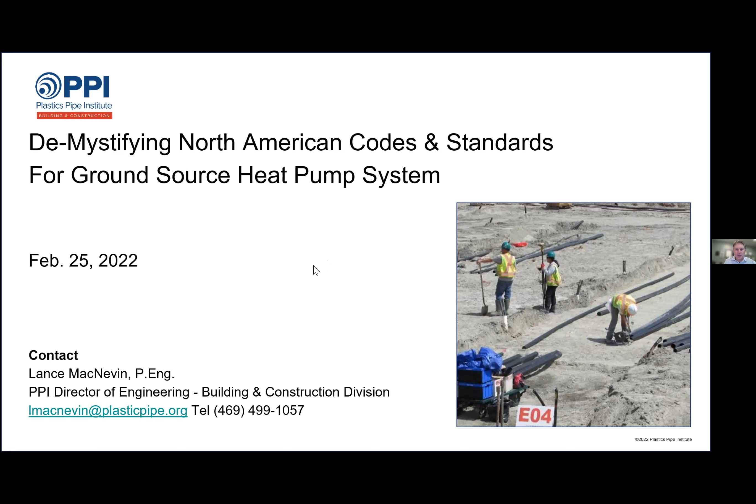So that's kind of the lay of the land in terms of what we'll be talking about for the next 45 minutes or so. And then we'll have time at the end for Q&A. Jeff read my introduction already, but I'm going to show it again because we are going to be talking about a lot of acronyms, a lot of industry names. So just in case you're not familiar with those, I'm just going to kind of spell them out a little bit.

If you hear people talking about ASTM, that originally was formed about 100 years ago as the American Society for Testing and Materials. And that's a group that writes product standards. ASPE is the American Society of Plumbing Engineers, made up of about 6,500 people, most of them plumbing engineers. AWWA is the American Water Works Association, that also develops standards for everything from products to installation to disinfection procedures. CSA is Canadian Standards Association, also known as CSA Group.

IAPMO is the International Association of Plumbing and Mechanical Officials. That is a code developer that we'll be talking about today. ICC is the International Code Council, also a code developer. IGSHPA, we all know who IGSHPA is, and NSF is more properly known as NSF International, but they were originally incorporated as the National Sanitation Foundation.

So if I do speak acronym a lot and use a lot of those things over and over, at least now you know what they stand for, or at least what they originally stood for. A lot of them don't really go by their full name anymore, like ASTM, they just go by ASTM International because their standards have been adopted well outside of the United States and all over the world. My contact information is shown there. As Jeff mentioned, I work for an organization known as the Plastics Pipe Institute. So just like IGSHPA, PPI is a nonprofit trade association.

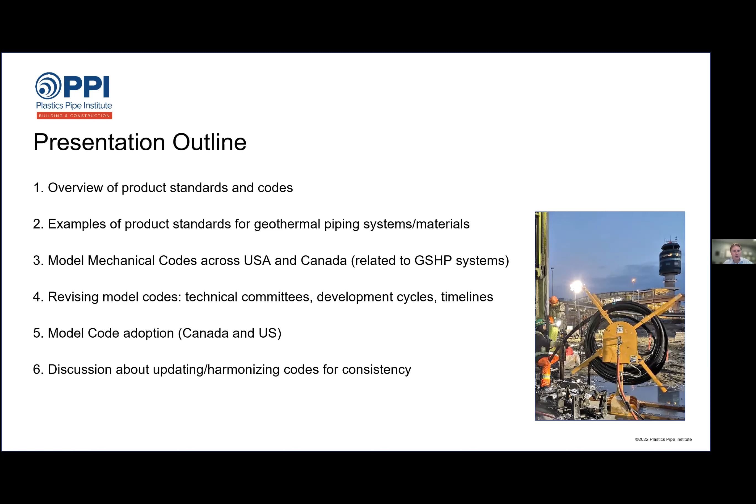And then at the end, item 6 is just really one slide with a discussion about let's work better at trying to harmonize code adoption so that there's not a different code in the next county over or the next state over, because I notice many drillers today are probably working in lots of different territories, dealing with different codes every time you drive 50 miles. So it'd be nice if we could have more uniformity in our regulations. So that's how we'll wrap up, and then we can open it up for discussion.

So if all that sounds good, we're going to start with section 1, which is an overview of product standards and codes, starting with product standards.

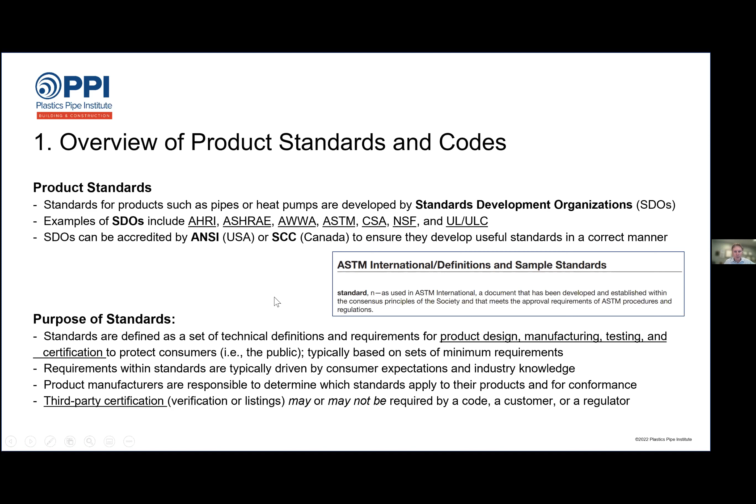Hopefully everybody is still here, because now we're going to move on to codes, and in particular building codes, which we're all pretty familiar with. A building code, it's a legally adopted document by a jurisdiction. So it could start as a document that somebody wrote or some committee wrote, but it really has teeth once it's adopted by a jurisdiction for the purpose of regulating a portion of the design and the construction industry.

And you're going to hear the term model codes a lot, because these big organizations such as International Code Council and IAPMO and National Research Council in Canada, that's NRC, they write what we call model codes. They're not the law of the land until a jurisdiction adopts them.

So I live in Virginia. Virginia regulators, the government of Virginia decides which code to adopt as the Virginia Building Code or the Virginia Plumbing Code. So normally they'll not try to write their own code from scratch in the state of Virginia, because it's pretty complicated to do that. The codes that have been around that are published today, many of them have been published for decades, 30, 40, 50 years.

They're constantly being updated and refined and having new products and methodologies added, and always getting safer too. So it's much better for a jurisdiction to adopt a code that's been around for a long time, gone through 20 iterations to get to where it is today, as opposed to starting from scratch and writing their own code.

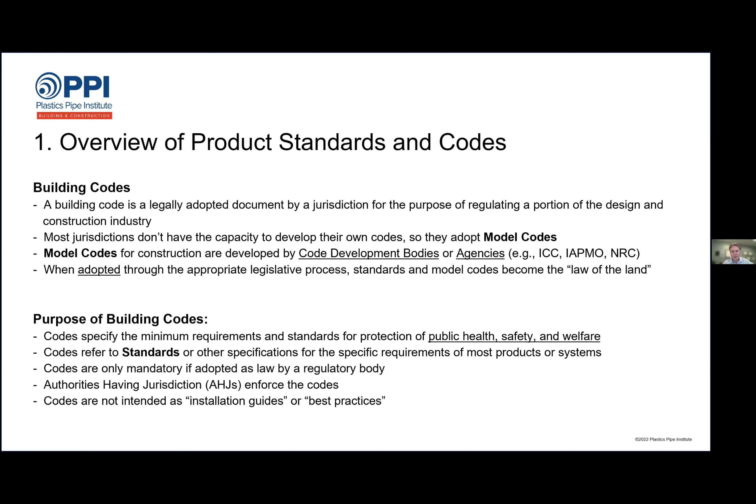But it also says if you're involved with code development, keep in mind, they're not intended as installation guides or best practices. Codes have to be written in mandatory language that says you shall do this or you shall not do that. You can go way beyond the code and do a much better job, but that's not the code's job of telling you how to make the very best, most optimal system in the world. The job of the code is to define systems that will work and that will be safe for the public.

So that was our introduction, just 2 slides. Now we're going to get into some examples of product standards. So when we talk about standards, I'm going to focus on pipes because I'm obviously a pipe guy and you people are pipe people too, because the geothermal industry uses a tremendous amount of pipe. So hopefully this is relevant to everybody. So some examples of pipe standards, kind of alphabetically.

The first one we have here is AWWA C901. This is from the American Water Works Association. It's a standard for polyethylene pipe for water service, all the way up to 3-inch diameter pipes. So it's really written for water service, but those are very good quality pipes with high pressure capabilities and everything else. So AWWA C901 is sometimes used as a reference standard for pipes that are appropriate for geothermal systems. Because if a C901 pipe can keep the water inside for many, many decades and is safe for potable water, it's probably also safe for geothermal systems.

So that's one example. Here's an example from ASTM. ASTM standards always have a letter followed by 3 or 4 numbers. So D3035 is a standard for polyethylene pipe based on controlled outside diameter. So that would be OD-based pipe. So that is another standard.

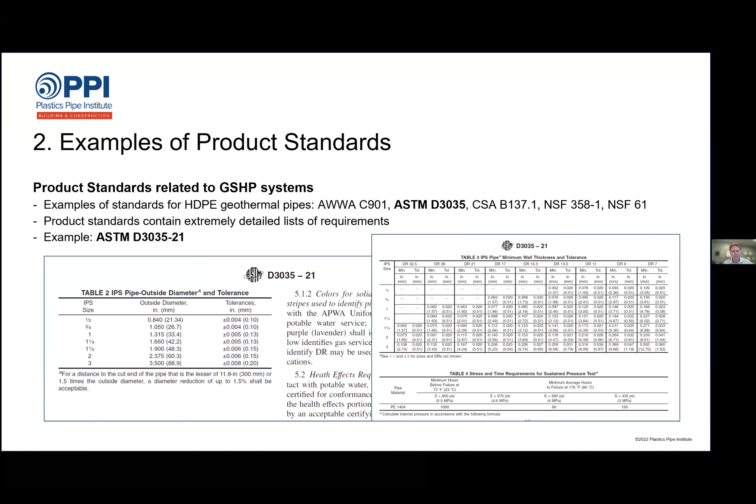But about 8 or 9 years ago, a lot of people from the geothermal industry in both Canada and the US said, you know what, that C448 standard for Canada, it's not bad, and it's a good standard for geothermal, but it needs to be written in a different way to be adopted in the US. So a so-called binational technical committee was formed, mostly under the umbrella guidance of Mark Metzner, who put this team together starting around 2012, 2013. People representing all kinds of organizations on both sides of the border to put together a standard that could be adopted in both countries. So it was in accordance with the ANSI standards development requirements so that it could be adopted in the US as well.

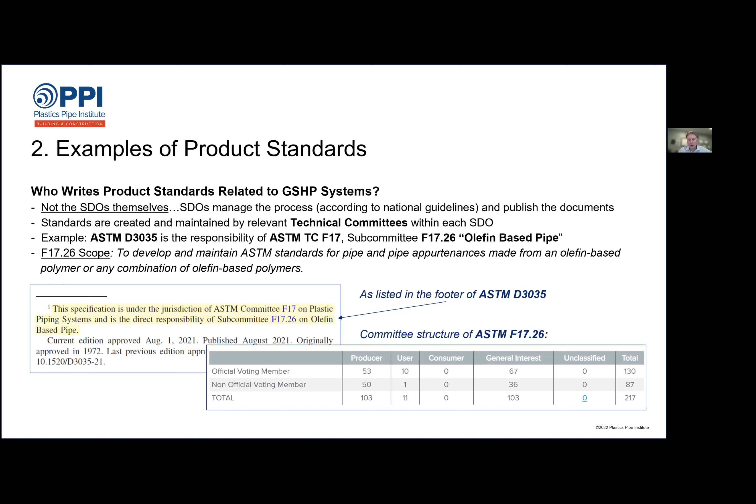Within CSA C448 that we just talked about, if you actually have a copy of C448, there's 4 pages near the beginning of the document that actually spell out who all the members of that technical committee are. So many of you are probably on this webinar right now. Thank you for your service on C448. It is a pleasure to serve with you on that committee because we're doing very good, important work there.

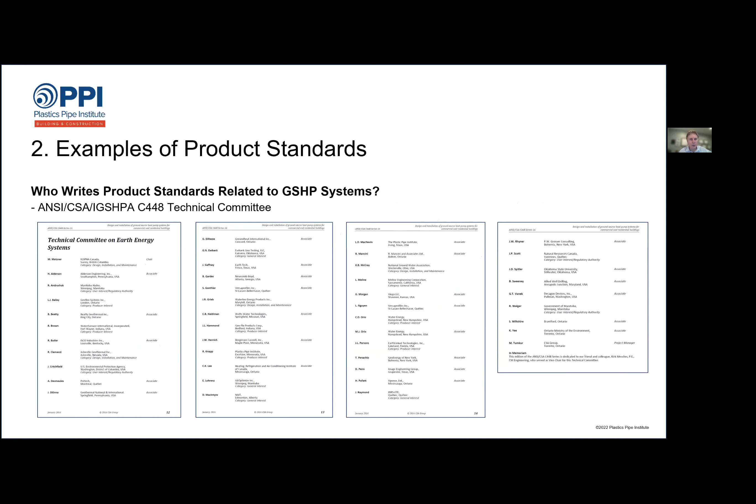They have the Uniform Mechanical Code, which has been around for many decades. And the other code is called the Uniform Solar, Hydronics, and Geothermal Code. 10 years ago, that was just known as the Uniform Solar Code. In 2015, they added hydronic content, and then afterwards, they added geothermal content. So those are 2 separate codes. The Uniform Mechanical Code covers everything from gas piping and ducting systems, and it's probably 500 pages. The Uniform Solar, Hydronic, and Geothermal Code is probably closer to 200 pages of content.

From the ICC family, we have the International Mechanical Code, which is focused just on mechanical systems, so it's analogous to the UMC. But then there's also the International Residential Code from ICC, which is basically the building code for 1 and 2 family dwellings, and then it has a subsection on plumbing and a subsection on mechanical systems. So sometimes you'll hear people talking about the IRC-M. The -M means the mechanical section of the IRC.

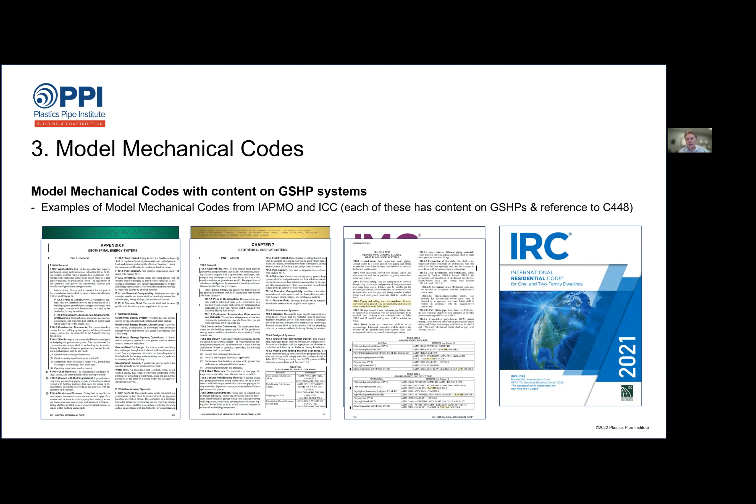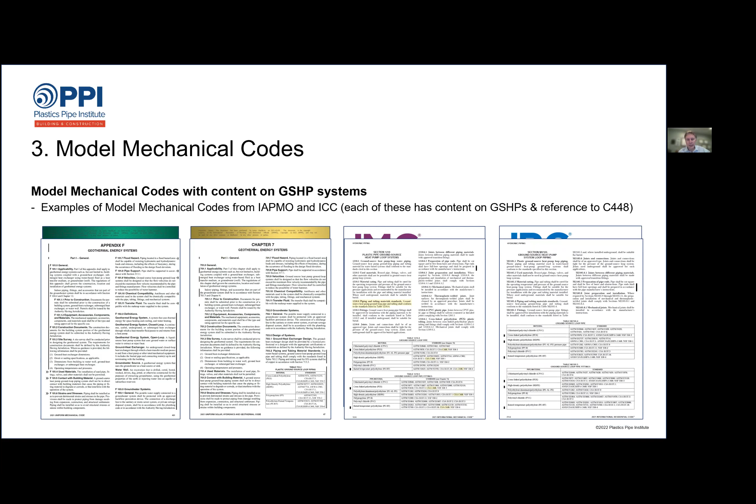Within the IMC, you have Section 1210, which doesn't get into a ton of detail on the whole geothermal system. It's really focused, probably pretty hard to read this, but what it shows under the IMC page view, it's for plastic pipe ground source heat pump loop systems. So it really focuses on the ground loop piping is what's in the IMC. No specifications for the other part of the system, it's really just about the piping. And then similarly with the IRC, when you find the section about geothermal, it's really focused just on the ground loop piping. So there is content in all of these codes, and they all refer to C448.

So for example, the International Mechanical Code was revised in 2021 with direct reference to ANSI CSA IGSHPA C448. So if you go to that code and you look in section 1210.8, under installation, it says piping, valves, fittings, and connections shall be installed in accordance with ANSI CSA IGSHPA C448 and the manufacturer's instructions. So in other words, if you're doing ground loop systems, you better get a copy of C448 and read what it says about how to put your ground loop systems into the ground, because that is a requirement in the International Mechanical Code as of 2021, which is just last year.

Now, something else about code adoption we'll talk about in a minute. If you live in an area that uses the I codes, they might not necessarily have adopted the 2021 edition yet. And there's often a lot of unfortunate delays. These code committees work really hard to update these codes every 3 years, but sometimes the jurisdictions that use those codes only adopt every second version, or maybe only every third version, which would mean only every 9 years are they actually updating the code that they enforce within their jurisdiction.

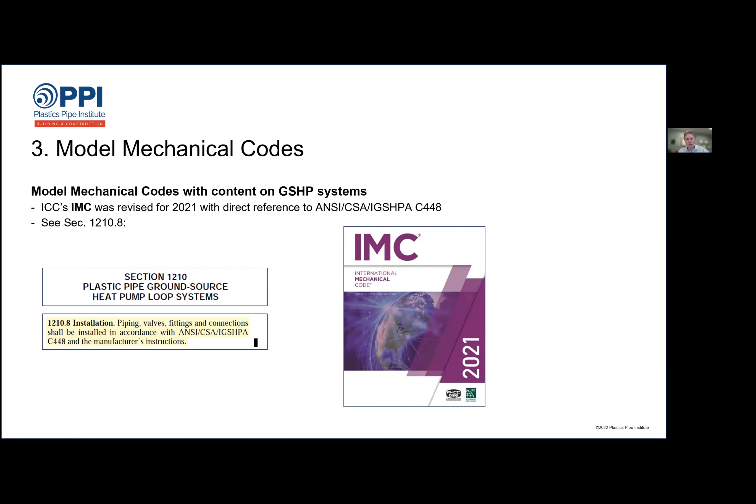And each jurisdiction sets their own rules in terms of when they're going to adopt a new version of a code. But these code development agencies are always promoting their new code as being better than the old one, and they are, and they would like to get them adopted as quickly as possible.

Now, just like we talked about with standards in terms of how a standard gets revised, now we're talking about how a code gets revised. So like I said at the beginning, if there's language in one of these codes that affects you, and you've said to yourself, who the heck wrote that stuff? I could do better. There is a way of getting involved with all of these.

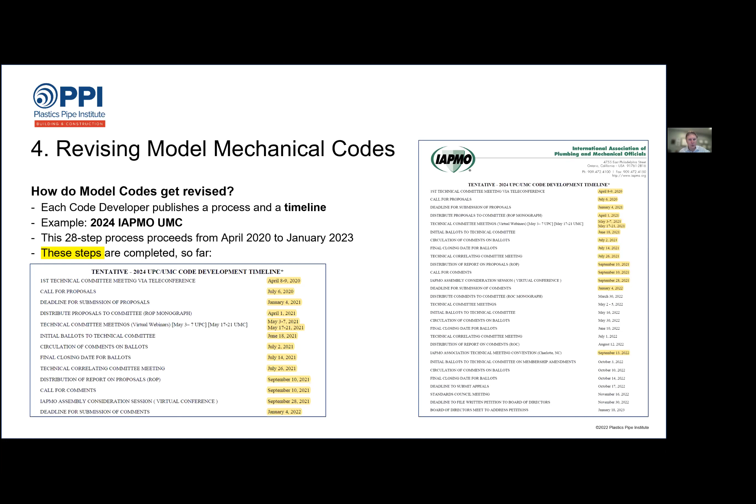The next step for the UMC is the committee is going to be meeting in early May. If you can read the image on the right where it says technical committee meetings from May 2 to 5, 2022, that will be an in-person meeting in Anaheim, California, where that technical committee will meet for 2 days on the UMC to discuss all the public comments and decide if they want to accept public comments or reject them. So again, a lot of details involved with the process. I'll try not to get into the weeds any deeper.

However, within ICC, they're actually a little bit further ahead in the process, and development of the 2024 ICC codes is mostly complete at this point, which is still 2022. So right now, if anybody has an idea for a big change to an ICC code, you're probably going to be proposing it for inclusion in the 2027 version of the ICC code. So this is a marathon, not a sprint.

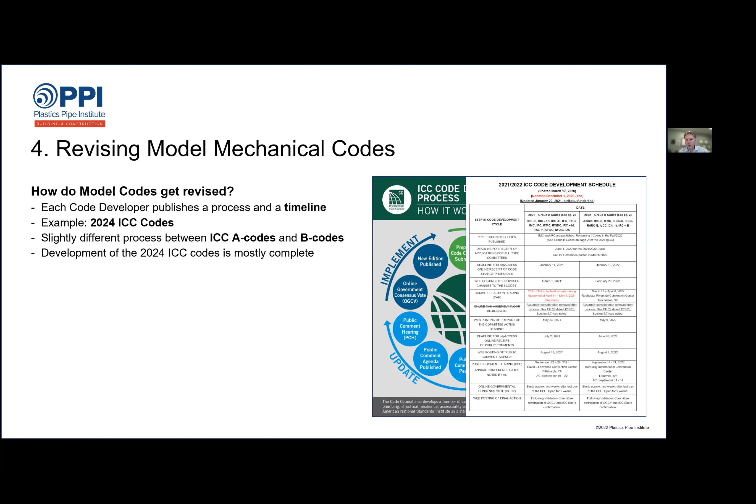You have to be quite patient and meet all these deadlines, make sure you attend all these hearings to speak to what your proposal was, defend it to the committee. You have to go up to the podium sometimes and say, I was the proponent of this. Here's why I wrote it. Here's why you should approve it. I'll answer any questions. Go through that kind of a process. Very formal. Robert's Rules of Order all day long.

So those codes are kind of wrapped up mostly for 2024. The code still open for business, though, and still open for proposals is the IAPMO code, again, the Uniform Solar Hydronics and Geothermal Code. This one is about a year behind the other IAPMO codes in terms of its development cycle. And right now, work is underway to develop the next edition of this one.

And the submission deadline for proposed changes is March 4th, which, believe it or not, is actually next week. So it's coming up soon. Not to spring this on you at the last minute, the window for accepting proposals to the next code was opened way back last fall, I think in late September, early October. And IAPMO issued press releases about code development for this code opening up.

Now, one thing that IAPMO did do for the next edition of this code is they formed 4 task groups, and again, promoted those through public media and the trade magazines, and anybody could join. You did not have to be an IAPMO member to join one of the task groups. So for instance, I served in the hydronics task group, which had 5 meetings over the last few months. And I also served on the geothermal task group, which had 5 meetings over the last 2 or 3 months. In fact, the 5th meeting for the geothermal task group was just on Wednesday of this week.

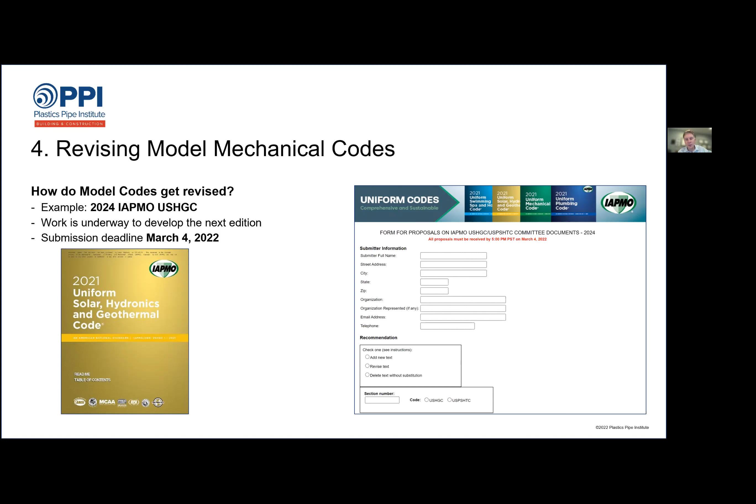And that task group includes people who you probably know, like Carrie Smith, Jeff Persons, Roshan Ravankar, Jeff Hammond, all of us working together to try to, in a task group way, agree to new language before it gets officially submitted to the technical committee. The technical committee for this code will receive all these proposals in early May and will meet on June 21st at the IAPMO headquarters in Ontario, California. The first day of summer will be spent in their office reading all the proposals for the next edition of the USHGC. And I'm on this committee, so that's how I know some of these details.

So if you're ever wondering again, who are the people that write these codes? That's not a secret. And in fact, inside the code book, inside the cover somewhere, you will actually find the list of all the different members. And the code development organizations, they try to keep it balanced. They don't want to have just a bunch of installers or just a bunch of manufacturers or anything like that. So they really do try to have a good representation of all the different stakeholders in the industry involved in one of these committees. So for the UMC, that's what's shown on the screen here.

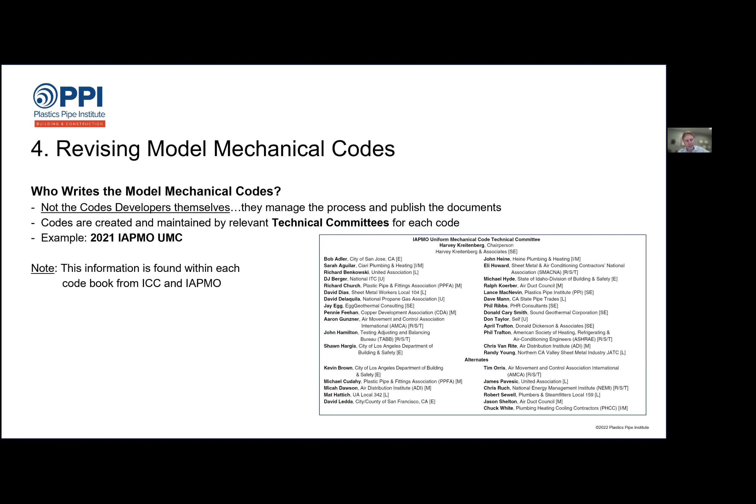There's a bunch of different associations and some actual plumbers and some inspectors, users of the code. So it's a wide variety of people involved with the development of the Uniform Mechanical Code. And again, it's not a secret. It's very transparent if you have a copy of the document.

All right, so now we're going to move into model code adoption, and we're almost done. Now we have some nice maps to look at. As I mentioned before, in Canada, CSA C448 is actually already adopted in the National Building Code of Canada. So it is the law of the land. The current version of the National Building Code of Canada was published in 2015. So it refers to C448-12, the previous edition. When the next edition of the National Building Code of Canada comes out, it should be referring to the 2016 edition. Meanwhile, we're working on the next edition.

And when the work that Jeff is leading to make the next edition of C448 is done, and that finally gets published, it'll probably have to wait a couple of years before it gets adopted into the National Building Code of Canada, which is supposed to be on a 5-year cycle. However, if you're working in Canada, in any province, any city, you could even lobby to have the newer version of C448 adopted, because it'll probably be much better than the current version. They normally are.

In the US, if you go to the IAPMO website, they do have a web page that shows where their codes are adopted. Here's just a couple of screenshots of that here. This is not complete, but these are some areas where the various IAPMO plumbing and mechanical codes are adopted.

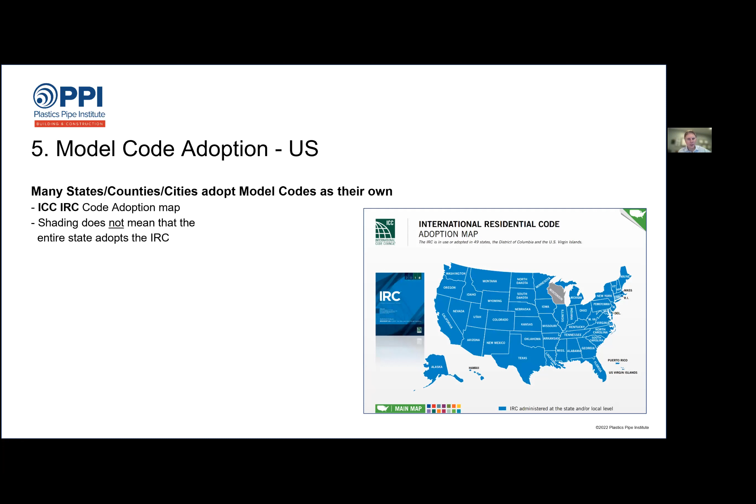And then unfortunately, we have a lot of states or other jurisdictions that do this on their own. They don't follow the model code. They try to develop their own. And I'm sure a lot of you on today's webinar have run into this. A few years ago, the state of Minnesota opened up to listen to comments about its geothermal heat exchanger program. So it's code for geothermal boreholes.

And it was open to the public. Anybody could submit comments. But Ryan Carda actually put together a good team of people from the IGSHPA organization to review what the current Minnesota rules were coming from the Minnesota Department of Health, and then put together a document with proposed changes. So a big team of people worked on that for probably 4 or 5 months. Ryan submitted it on behalf of that team of people.

And then ultimately the Minnesota group of officials that read the changes that were submitted by the group of people representing IGSHPA accepted about 25% of the changes that were submitted, far less than half. So it didn't necessarily go over really well, but that's the process in Minnesota. So if you want to change it, what you do is you try again, and you keep trying to change the rules.

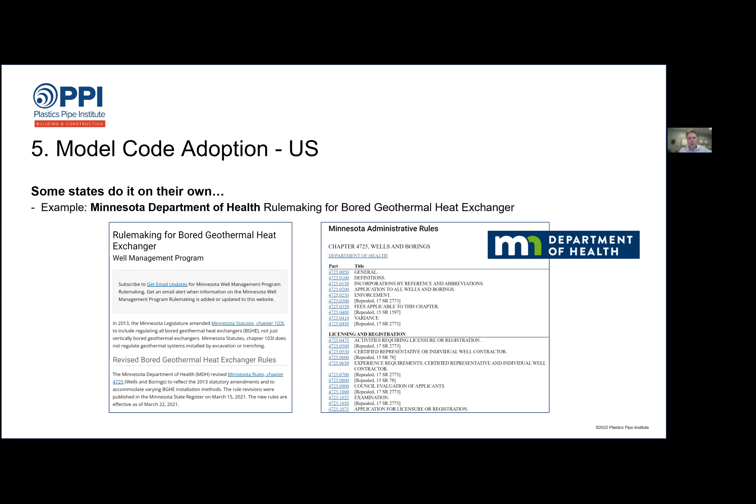The problem though, with states that make up their own codes, let's say for geothermal, or counties or cities that make up their own codes, they could cite inappropriate product standards. And that could cause confusion with manufacturers and the supply chain and the installers. And this does happen a lot, even on the piping side, where they list the wrong piping standards. And then everybody who is trying to supply a system is like, what are they really looking for? I'm not sure what the requirements are here.

So you could call those custom codes, and they often try to be a little bit of this, a little bit of that. They try to pull the best out of one code, the best out of another code to make their new superior code that works best for the state of whatever, which reminds me of the story of Dr. Frankenstein, who tried to make the superhuman being based on the head of the smartest person, the legs of the strongest person, all these bits and pieces from various people, where he tried to really create the best person.

That's what some of these code creators try to do, but you know the story of Dr. Frankenstein's monster. It didn't work out well. That wasn't really what was intended. You should just allow the natural process to develop the most evolved species, or in this case, rely on model codes that have very defined, deliberate processes with lots of great experts from around the country to develop the best version of these model codes.

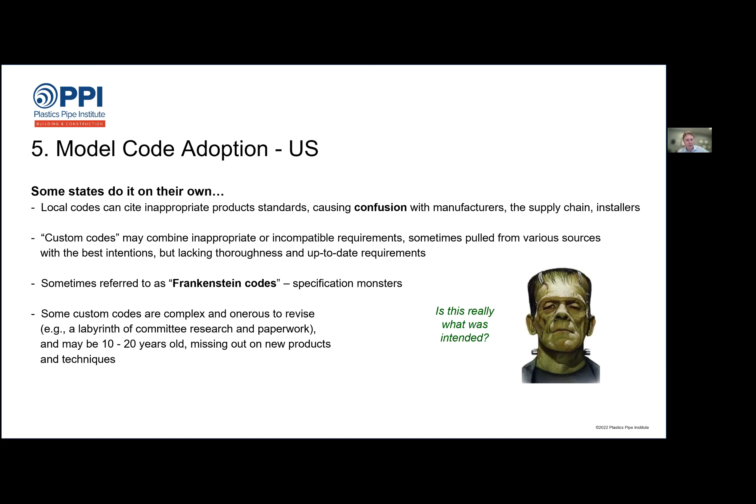So for everybody who's been involved with one of those situations where your local code isn't the same as a national code, and it's very restrictive and may even seem to be a little bit bizarre, we all feel that pain. And really the best path forward is my last slide. Let's focus on the single best code that we can put together as an industry. And then let's work really hard as an industry and a collection of associations to try to get that single best code adopted all over in Canada and the US. And I think that's what's going on with the work on C448.

This slide starts with, why should harmonizing codes be this difficult? And it really is hard to change codes, no doubt about it. But heat works the same, no matter what jurisdiction you're in. Ground source heat pumps work the same, no matter what jurisdiction you're in. Modeling should work the same, no matter what jurisdiction you're in. Grouting should work the same, no matter what jurisdiction you're in.

So having really one uniform code that has the best collection of minds working together on it in a deliberate process, as is going on with C448. I have a lot of faith in that process, being led by Jeff and Mark Metzner and many other subcommittee chairs and task force chairs. And I really believe that's going to develop an amazing code, probably the best in the world when it comes to geothermal systems. C448 is already excellent. It's going to get even better in the next edition. And that'll simply benefit everybody involved in this industry, I think.

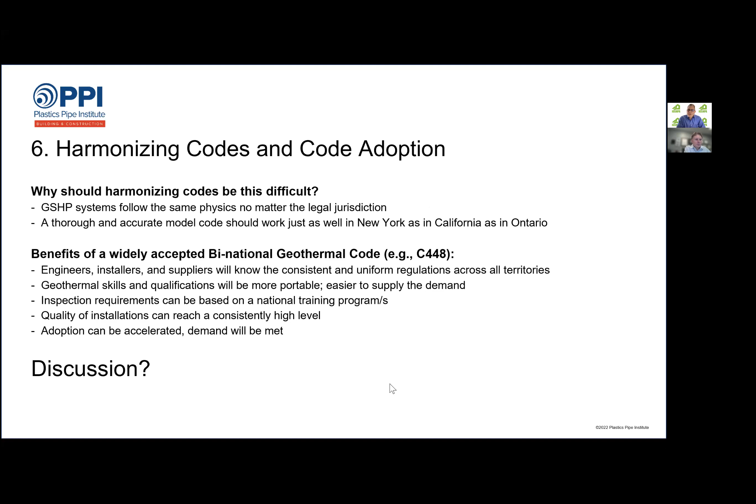Maybe in our last couple minutes, do you have any updates on new pipe technology or new products that you're seeing at PPI? Sure. For those involved with C448 or the other codes, one of the materials I mentioned earlier, PERT, polyethylene of raised temperature capability. It's a relatively new product in North America. It is high density polyethylene that is capable of withstanding higher temperatures. And there are ASTM and CSA standards written for PERT now. So we're going to propose to add PERT as a new material into the codes.

We're updating some of the detailed information about polyethylene requirements and PEX requirements. In the next edition of C448, the piping task force is working on putting in good installation procedures for putting pipe in the ground, and a safer way to make sure you're not cutting or gouging it, not kinking it, and not over pressurizing it, from the inside out or the outside in. So we've been working on a lot of new content that way.